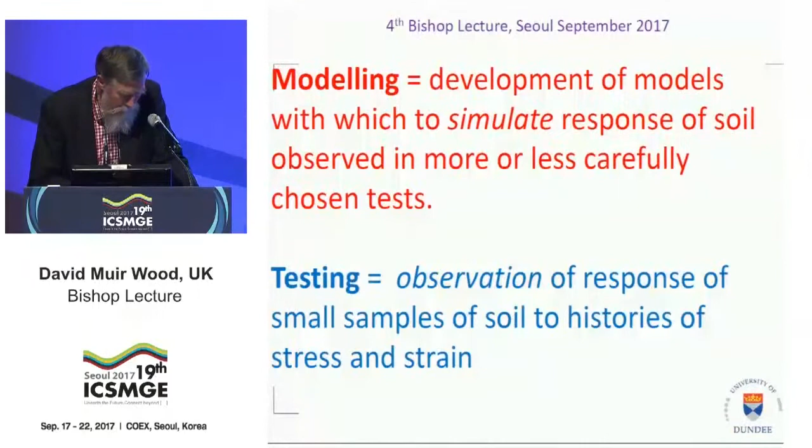So the constitutive model is something which mostly we don't try to spend the time dealing with. We just use it because it's the building block in the numerical analysis between the equilibrium statements, changes in stress, and the compatibility statements, the changes in strain. But it's there. And you may have to choose to use an elastic model, a Mohr-Coulomb model, or a Cam-Clay model. These are all familiar names of models that we'd use in numerical analysis.

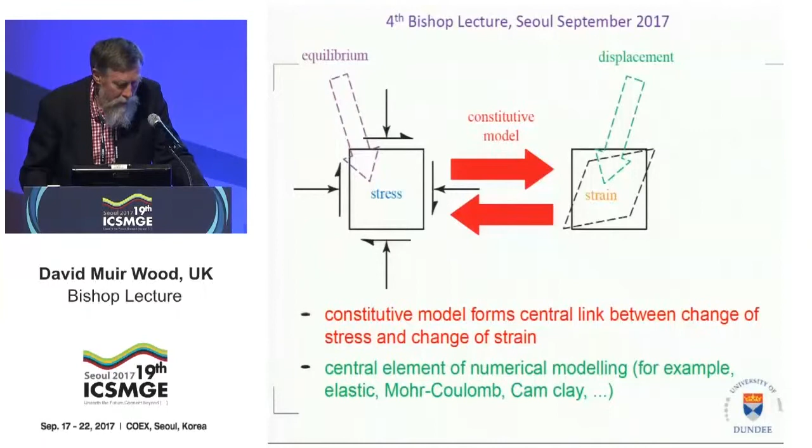But all testing that you perform is conducted in the context of a particular model, either willingly or unwillingly, consciously or unconsciously. For example, much testing is done in order to choose parameters for a model itself. That's a common theme. Fitting models to observations, another common theme. Rarely attempting to refute the constitutive conjectures, the way in which the models are built. But we'll see that's actually rather key.

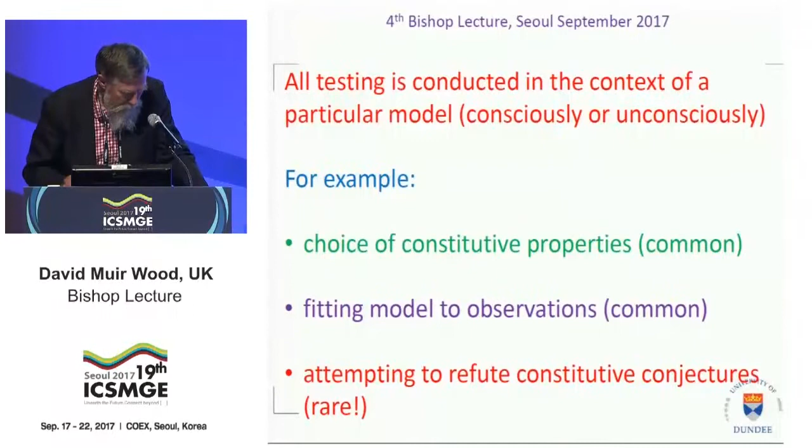So I'm going to concern myself with continuum models, which is to say we're going to deal with macroscopic concepts such as stress and strain, although we'll see they're difficult to define, simply because the models which I've used mostly are, in fact, described in terms of stresses and strains. So elastic plastic modeling is my theme, or has been my personal theme, but the comments that I make about modeling are relevant also to other constitutive frameworks. As I said, the printed version contains additional case histories for which there's not space in this lecture.

So the first thing is then element or system, and thinking about intermediate scales. What is the size of the representative elementary volume that we might define for a real soil material? And the question really to associate with that is this one. How large should a sample be in order that it might appear homogeneous? The first guess would be to say that the scale of the problem is set by the median particle size D50. But it will turn out that's really very optimistic as a guide.

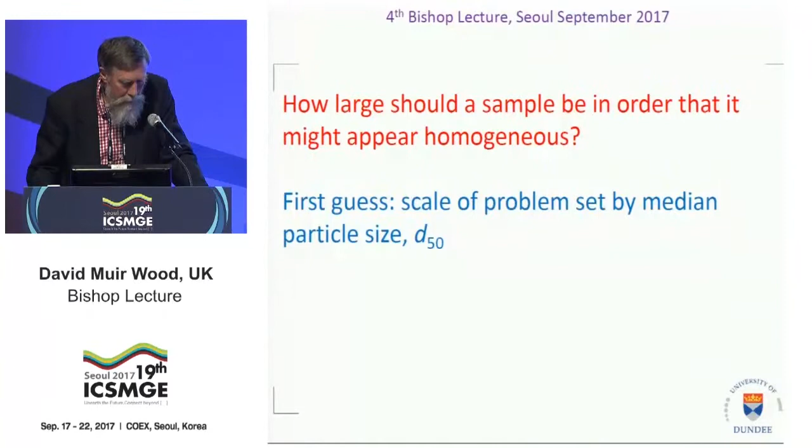But this idea of the particle size influence is relevant because when we start thinking about a scale, then that rather indicates the sort of size of sample that we need to fit in the number of cells of behavior. We'll see that in a moment. So the first thing is then to look inside the sample. And we can look inside the sample, first of all, in terms of deformations. That seems to be the easier thing to do.

And I'll pick an example, an elaborate apparatus, but one in which we can see quite a lot about the behavior of the material. This is the so-called 1-gamma 2-epsilon apparatus developed at Grenoble. When I first saw this apparatus, it was made out of Technic Lego, but it's now made out of rather more substantial materials. But it's a plane strain apparatus in which there's nothing happening in the out of plane direction. And it uses an analog granular material, not real soil, but actually rods, a so-called Schneebeli material we'll see in a moment.

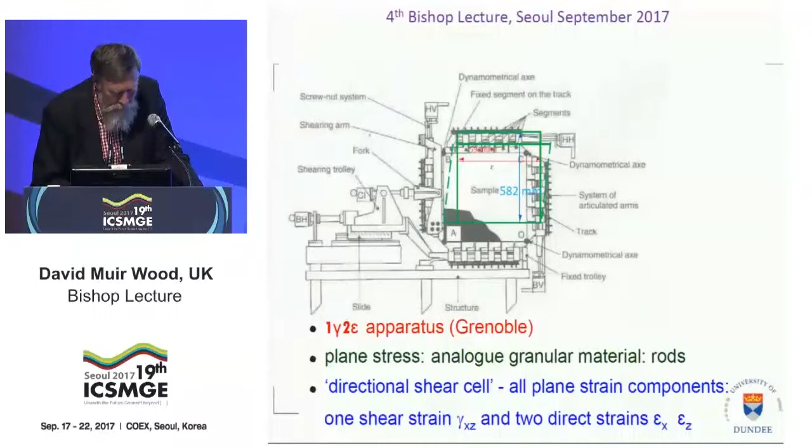It's a directional shear cell in which all the plane strain components can be applied. You can have one shear strain, and you see the shape of the sample changing here, and also apply direct strains in the horizontal and vertical directions. So there are these two direct strains and one shear strain. Here is the grading of the material tested. It's an analog material with three sizes of rods, 1.5, 3, and 3.5 millimeters in this case.

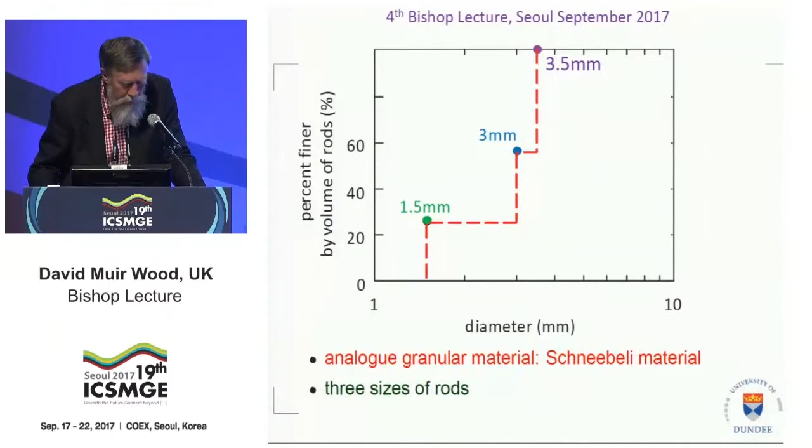And this is a typical result from fairly early on in a shear test on this material. We start off with essentially a uniform distribution of these rods, but very quickly, in the very early strain stages, you see that the shear strains and the volumetric strains show really quite a structure of variation, and you certainly couldn't say that they are varying uniformly across the sample. So there's clearly something happening which is to do with not just the particle size, but to do with a scale bigger than the particle size.

So we've got homogeneous boundary displacements, but the internal strains are clearly showing something which is quite clearly patterned and heterogeneous. And I think that when one looks at these things, one sees that the stage at which these strain features develop is very early on, and it's almost as though the heterogeneous state is the natural state of these soils. In this case, perhaps there's a cell size with a dimension of the order of 15 times d50. So that would be an indication of the sort of size of a building block from which you might build up observations.

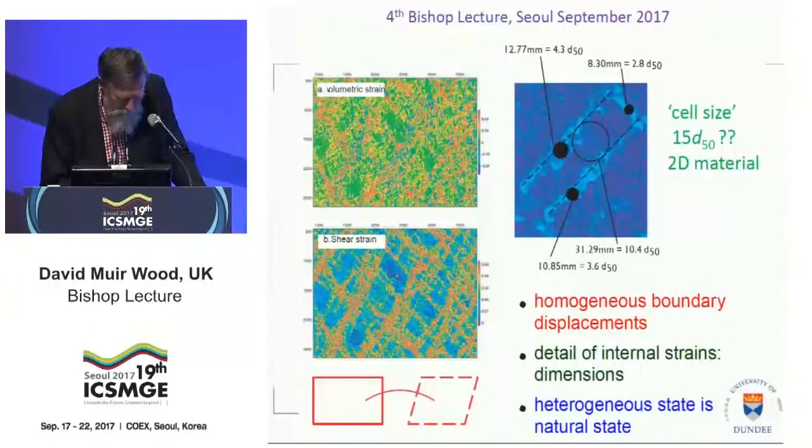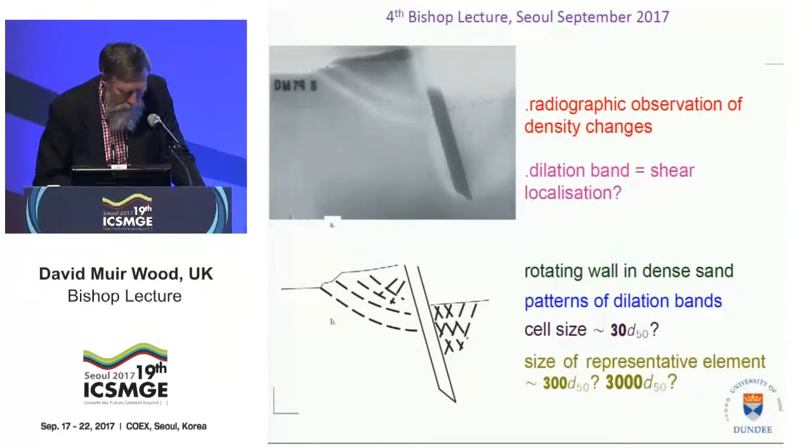That's looking inside the sample using strains. Can we say anything about the stresses? Well, we know that Burland said that stress is a philosophical concept. We cannot see stresses, we can only see the consequences of stresses.

But if you have a birefringent material, as we'll see in a moment, we can use analog soil particles and visualize them under polarized light, and then see patterns which give us some indication about the stresses within those samples of the material.

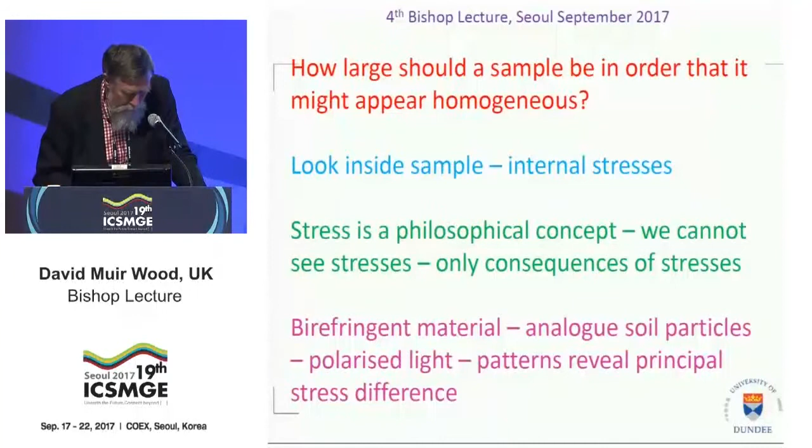So, for example, you have a disk which is being subjected to diametral load of progressively increasing magnitude. As you observe this under monochrome polarized light, you get a series of fringes forming, and the pattern of fringes progressively develops as the load increases. So as you go from low load to high load, the number of fringes increases. Low load here to much higher load there.

And this pattern can be used to deduce the difference in principal stresses within the particle, the material under study. These are diametral loaded particles. And just by the way, if you have a spherical particle, you can also see these same sorts of fringes within that particle. And here's a bit of crushed glass as well. The same thing applies for that. But of course, it's much harder to interpret these things when you have a rather irregular shaped grain as opposed to the single disk of the previous case.

But these are the tests done by Drescher with de Josselin de Jong back in the 70s, classic tests showing the effect of stress changes on an assembly of photoelastic disks. The main diagram shows the disks themselves. The lower diagram shows the interpretation of a picture like that in terms of the forces between the particles of the photoelastic picture. So the thickness of the lines indicates the size of the interparticle force.

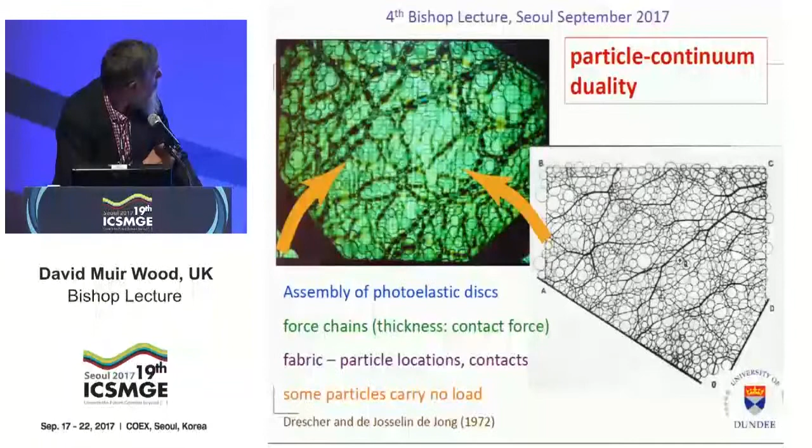What you clearly see from this immediately is that there's a huge variation in the way in which the stresses are being transmitted through this particle assembly. Looking at the main picture, some particles have no stress in them at all. Some particles have very heavy stresses in them. And this is something which has been found also in discrete element modeling. In a sense, the DEM work has done nothing but show that the photoelastic pictures of Drescher and de Josselin de Jong were correct.

We see columns of particles carrying the load. We see that the adjacent particles may carry very little stress, but actually are there to provide a bit of resistance against the buckling of the main columns. And you can imagine that this whole assembly is very sensitive to rotation of the principal axes.

So just look at these various cases ringed here. Some of them indicate very high stresses at the particle contact. Against the unloaded boundaries, there's very low stress. Obviously, there's zero stress in the voids, and some particles themselves have no stress in them whatsoever. So the concept of stress in a particulate material obviously is something which is really quite difficult to get to terms with.

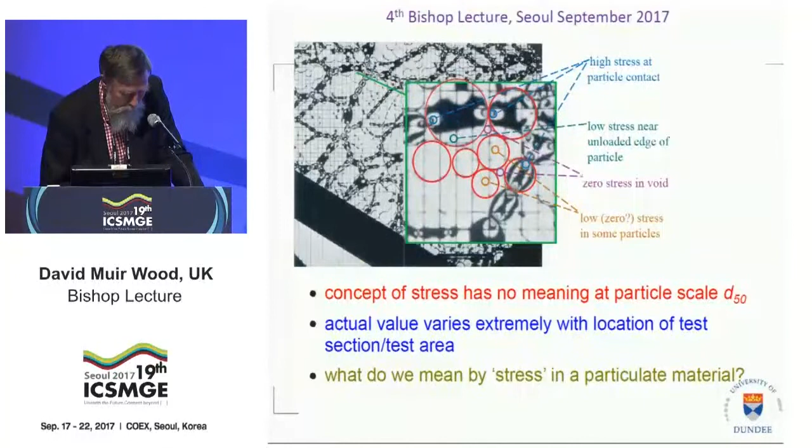Well, okay, let's see how small an element can appear homogeneous. If we look at the fabric of the material, at these force chains, you could say that the typical network mesh size, the typical size of these loops here, is of the order of 5 to 10 times the particle size. So perhaps the network is going to be characterized by that sort of dimension, and a continuum could be described as one which has scales of perhaps 10 to 100 times that, so 500 to 1,000 times D50 here.

So if you stand back and look at a network of that size, then you'd see essentially homogeneous heterogeneity appearing in the material, if you can imagine this concept. But it's just defining another scale which is considerably bigger than the size of individual particles.

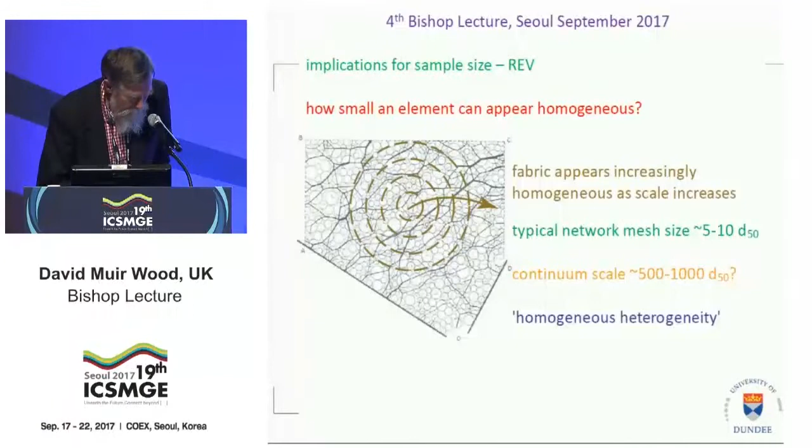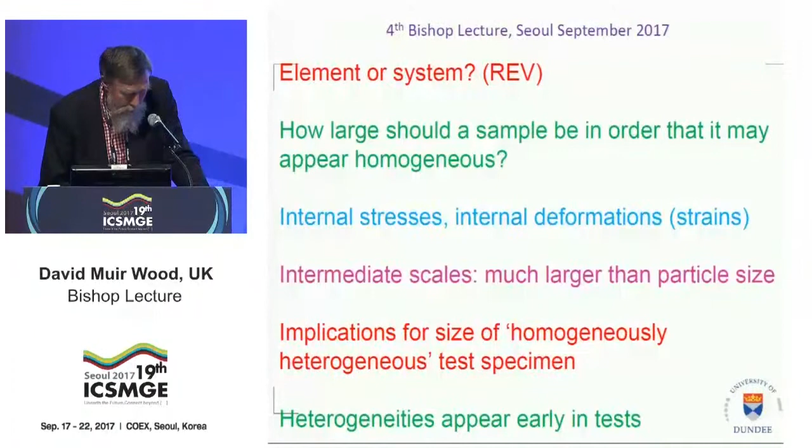So the question was, how large should the sample be to appear homogeneous? And the answer is that it's much larger than you thought. And this has implications for the size of the homogeneously heterogeneous test specimen that you might choose to use. There's also this clear result we find that these heterogeneities, these changes in the non-uniform structure of the deformations, appear very early in a test, not late on. So those are the conclusions for that particular section.

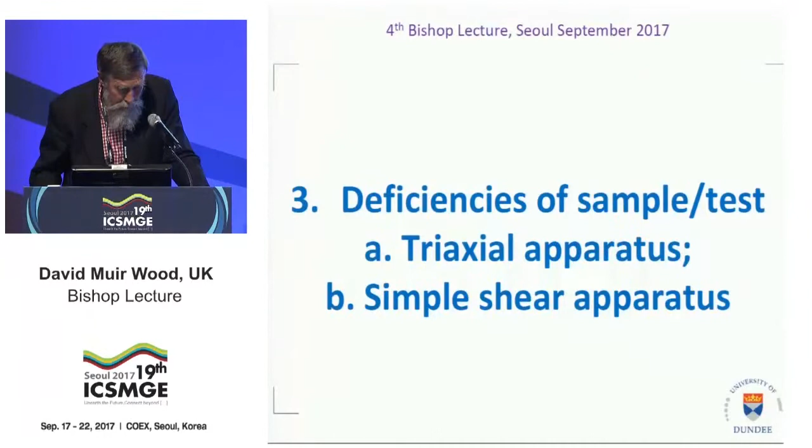Now the next one is then going to be deficiencies of the sample, or the test. And we'll look at two apparatus, the triaxial apparatus, which has been mentioned already this morning, and the simple shear apparatus. Well, we know that if you have triaxial samples, then sometimes you may find that the imposed stress state is actually axisymmetric.

We have a cell pressure we're applying around the sides of the sample, but there's no particular guarantee usually that the soil specimen has a vertical axis of symmetry in terms of its anisotropy and its fabric. So it's being compressed between rigid platens, but there's no particular reason why that should result in an axisymmetric stress state within the sample. So it may be, if you're lucky, that actually there is a resulting axisymmetric stress state, but it's only going to be by chance rather than by routine.

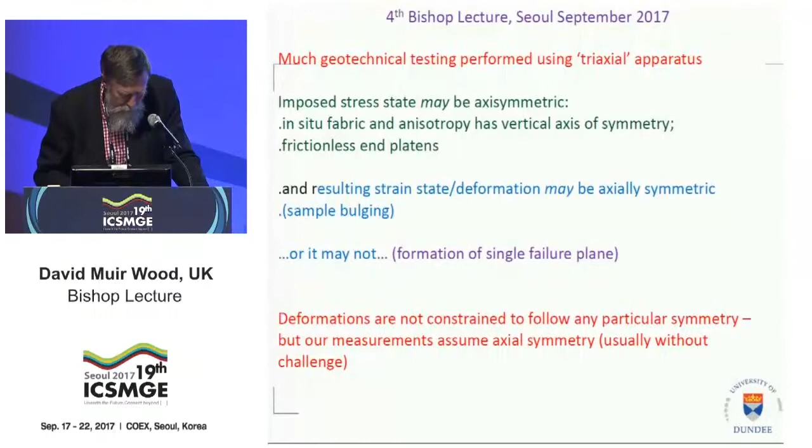So the deformations are not constrained to follow any particular symmetry, but our measurements always assume that, because all we do is measure the external axial strain and volumetric strain, and we assume that axial symmetry without any challenge. So it's very tempting to assume that things that you don't choose to observe don't even exist. You imagine this is a sample taken out of the ground with a natural anisotropy which is not clearly vertically oriented. We try to subject it to triaxial compression testing with either rough ends or with smooth ends, and the sample will do what it wants to do, but it won't behave uniformly under that imposed constraint.

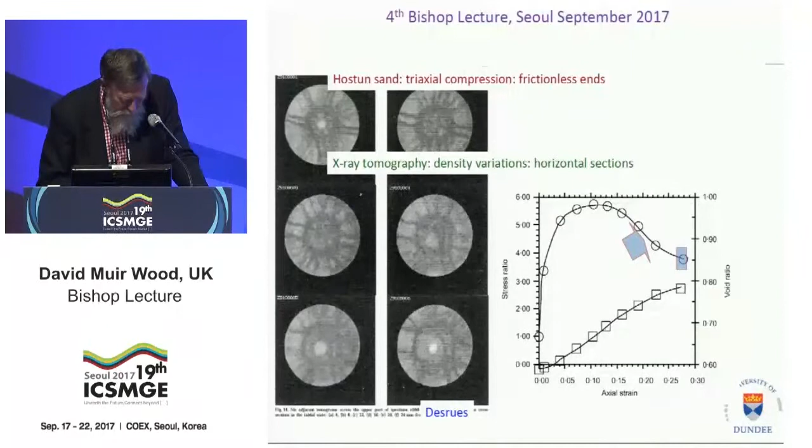Well, there's wonderful work been done at Grenoble by Jacques Desrues and more recently by Eddie Andò, using tomographic techniques, using X-rays, for example, to detect variations in soil density, from which we can produce really quite elegant and intricate mechanisms of internal deformation. These are ones which show the volumetric strains that he picked up in the 90s. And these are sections you can see through a triaxial sample, and if you try to put them together, you get these really rather fancy, amazing mechanisms of volumetric strains occurring within a triaxial sample.

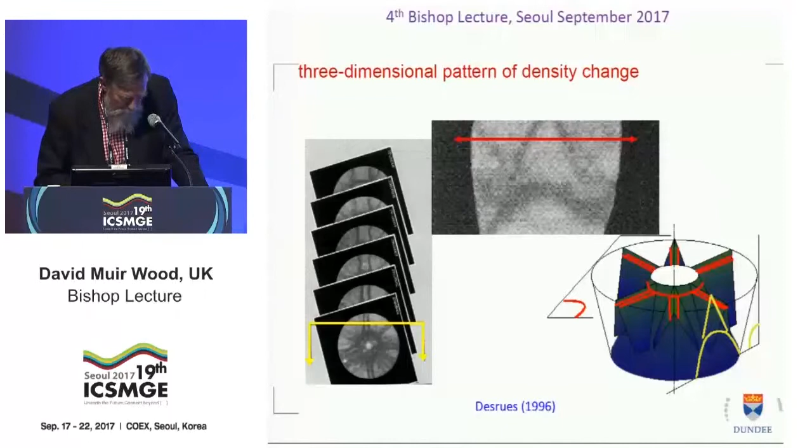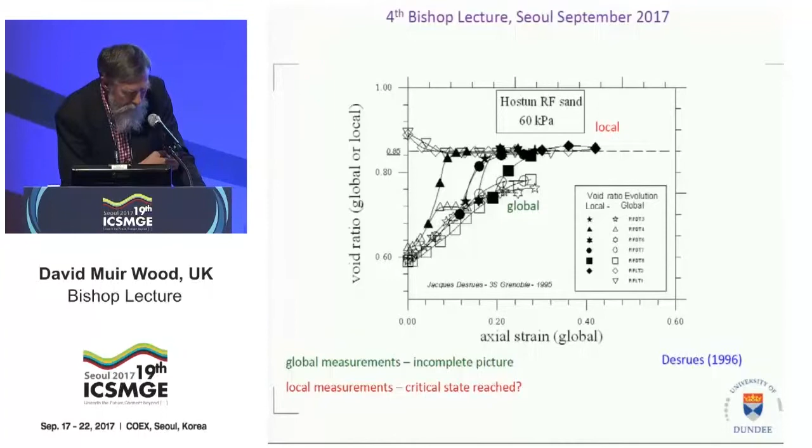So this is a sample which we think is behaving in axial symmetry, and here we have these mechanisms which are clearly not axisymmetric mechanisms at all. It's behaving in a totally different way, a free way, if you like. And these are taken from X-rays at various stages of the testing. And in fact, if you look at the volume changes within the shear bands, then you find you get a consistent critical state condition, whereas away from those bands, you get a much more delayed response. So tracking density changes shows that the critical state is reached within the dilation bands, but not globally within the sample.

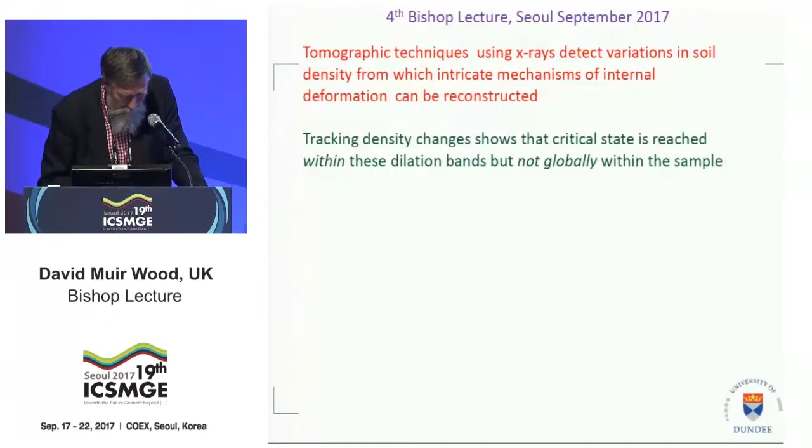These are more recent imaging done by Eddie Andò and Jacques Desrues, which are fantastic pictures showing variations in distortional strains within the sample. So these are totally not axisymmetric pictures. They're mechanisms of deformation which are beautiful and elegant, but are showing something quite different from an axisymmetric response in our triaxial sample. And we await more talk about these pictures from the Grenoble people.

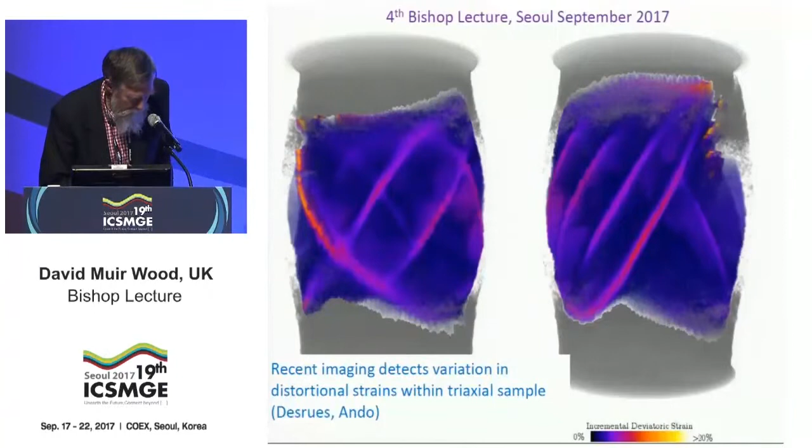So the implications that we see from these pictures is that we've got individual mechanisms which are far from axisymmetric. They reflect the response of the sample to the imposed stress and the boundary displacement constraints, but a response which is very specific to the triaxial apparatus and nothing to do with what happens in the ground. And once again, we see that precursors of such mechanisms are very small deformations. So even from an early stage of the testing, we're getting these deformations occurring.

Now, I did my research at Cambridge. I started my PhD research just after Roscoe had been killed, but he had an obsession throughout his research career with simple shear testing. Perhaps he's right, I don't know, but he was very keen on that device. But the simple shear device is well known to be flawed because there is an absence of boundary shear stresses on the head of the sample here.

So without the shear stresses there, you need to do something about measuring the distribution of normal stress, which itself is variable, as in the second picture, across the sample. And one way to cope with that is to surround the sample with load cells, so stress measuring devices, as in this bottom picture here, which essentially is an apparatus used by Stroud, whose name was mentioned this morning, for looking at the behavior of sand under simple shear.

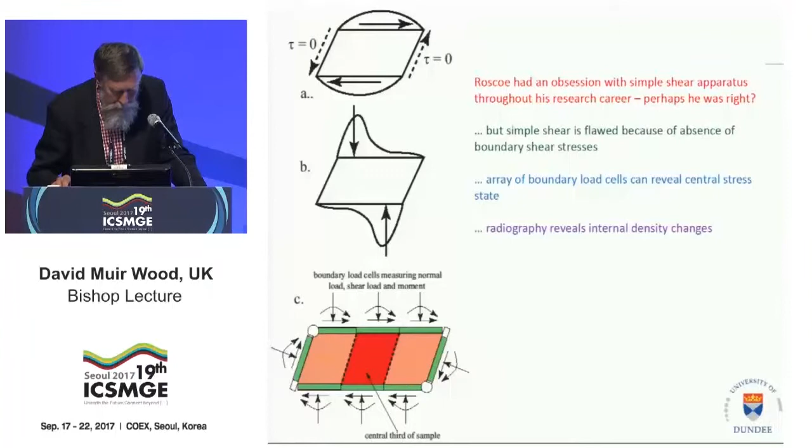So that's the way of looking at the stresses. And with X-rays or radiography, you can look into the sample and see the density variations and try to see what is the effect of the sample size on the density variations, patterns of those that occur within the sample. And the question we can ask ourselves here is, how high should the sample be? What should its dimensions be?

Should it be just high enough to contain a single shear band? That feels too constrained, but it's one possibility. And essentially that's the one that Stroud adopted, so you had a 20 millimeter high sample for 1 millimeter size sand. But alternatively, you might say, well, let's make the sample high enough to allow free development of internal shear bands. This is a picture from Dicky Bassett's work.

But then you start seeing elaborate internal patterns which are strongly influenced by the corners of the apparatus. So these variations of density here are essentially really rather curious effects produced by the corners of the device. So the ideal sample height perhaps depends on the size of the material being tested.

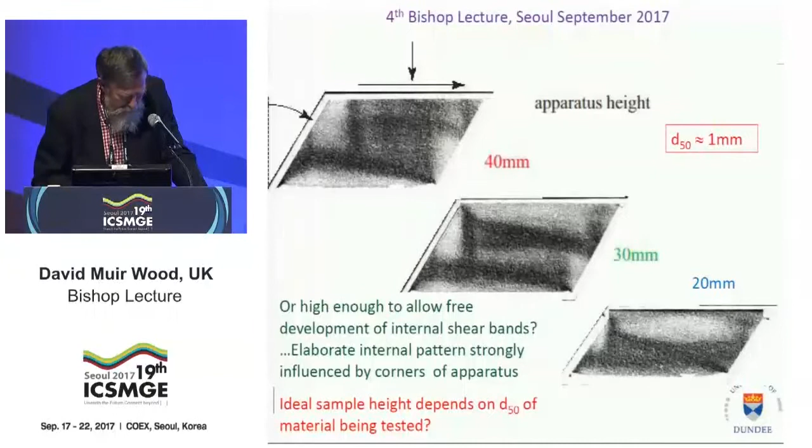I mentioned that when we're looking at the behavior of these columns of particles heavily loaded, that they are very sensitive to rotation of axes. And as a corollary of that, one might say, well, one should be looking at laboratory tests which try to themselves look at the effect of rotation of axes. But you'll see that the possibilities that we have are limited and all rather flawed in their different ways.

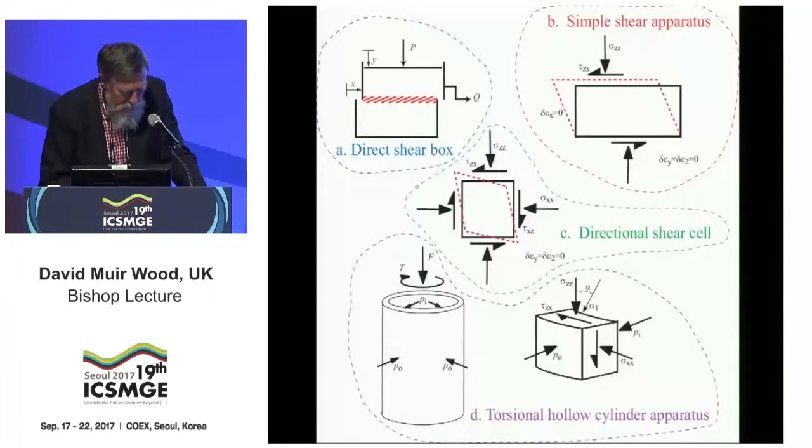Obviously, the direct shear box is producing a very localized behavior. Simple shear we've just seen has these problems with the shear just on the ends. Directional shear is essentially the Grenoble device, very complicated. And the hollow cylinder has variations with radius of every stress and strain component, and it's difficult to actually assess the uniformity of results from such a device.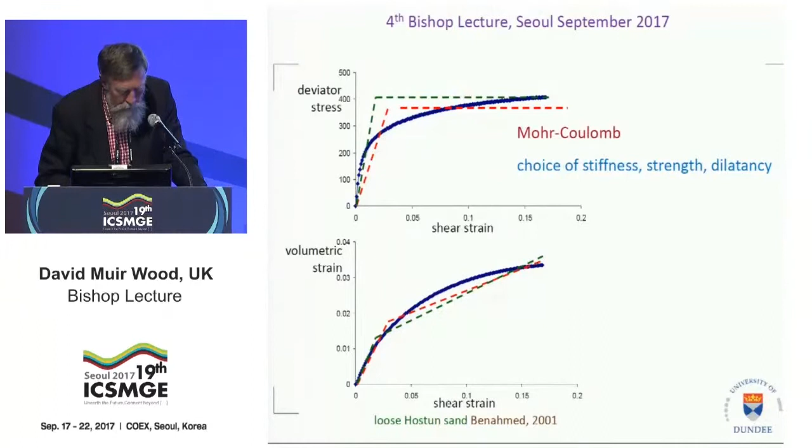And the volumetric response also shows nonlinearity. So we have nonlinear responses in terms of stress-strain behavior and in terms of volumetric behavior, and yet we're trying to fit those with a so-called Mohr-Coulomb model, in which we've got to choose stiffness, strength, and dilatancy to match these data. We can't do it. We're trying to fit two lines to a curve.

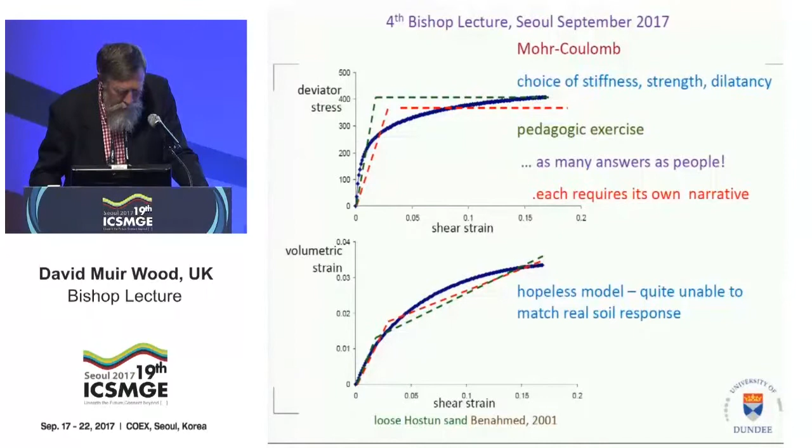So it's an interesting exercise, and if you have a class of 2,000 people as in here, everybody would produce a different answer, and each answer would require its own narrative to describe why you produced that particular set of parameters. It's obviously a hopeless model because we're trying to fit a curve with two straight lines. And if you're faced with a hopelessness like that, the best thing you can do is to change your model in some way to improve the match with the observation.

Let's just quickly look at the problems that we have with this model. There are three problems, basically. One is that the incremental stiffness is either elastic, so it's high, or zero for failure. The second one is that we have indefinite dilation or compression going on at failure. And the third one is that strength is chosen as a soil constant.

But in fact, we can deal with all three of these defects by making some simple changes to this Mohr-Coulomb model. The first thing is this one here. Rather than using a straightforward elastic analysis, we can say that the stiffness varies steadily with strain, and as the strain increases, so the stiffness reduces towards zero. So we introduce a monotonic increase in strength, a reduction in stiffness with strain. That seems straightforward enough.

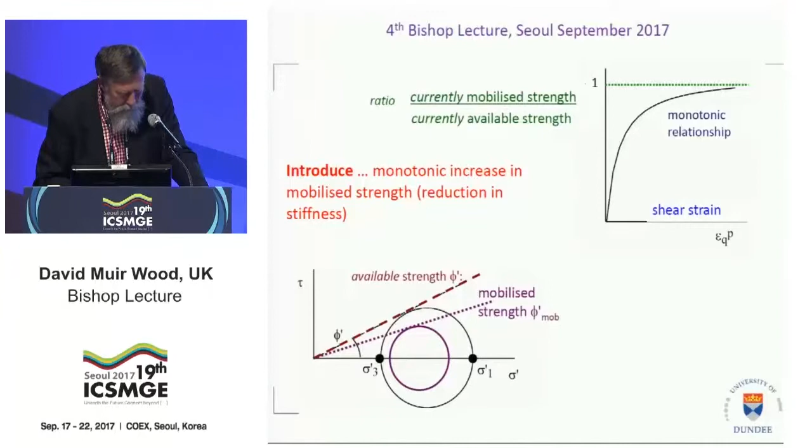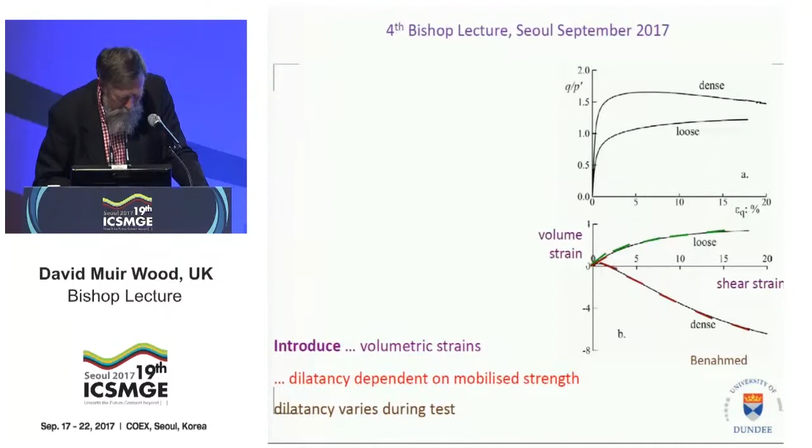The second one is to introduce some dilatancy effect, which is going to say that the volumetric straining varies with density and with stress state during the test. And we can see some evidence for that from classic work from Taylor, where we have a shear box test, always good value. So mobilized friction against deformation here, volumetric change against deformation there.

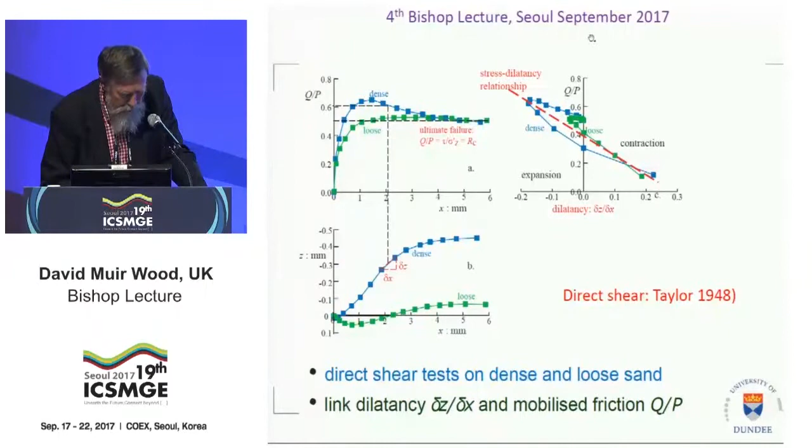And if you look at the slope of the volumetric change graph and plot that against the mobilized friction, then you see something which is essentially a linear relationship or a sublinear relationship between the two quantities. So there's a link between the dilatancy, the volume change, and the mobilized friction of the material. So that's very easy to do, introducing that dilatancy law.

And the third thing to do is say something about strength. These are tests on steel balls done by Peter Wroth back in the 50s, and he was looking at the effect of having different densities, different stress levels, on the ultimate state that you have for this material. So the left-hand diagram shows the specific volume against deformation in the shear box.

The right-hand diagram shows the end states of these various tests. So here's an end state there. All these different initial states produce the same volumetric packing at the end of the test. So the end points fit onto a clear line in terms of the stresses and the volumetric change, a clear critical state line linking these final states of these tests with different starting points.

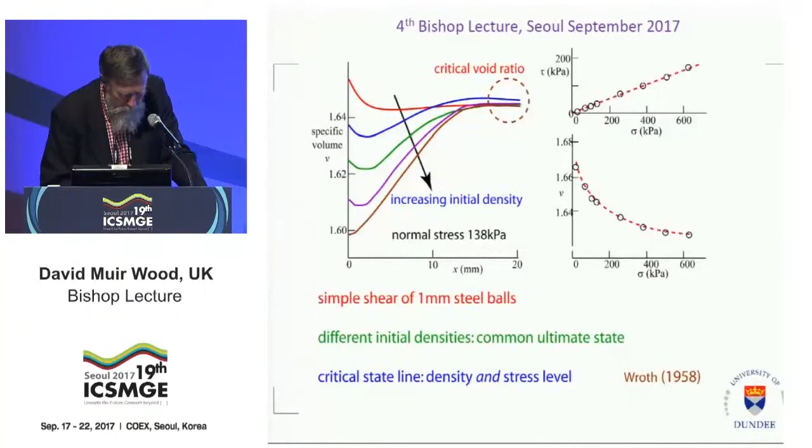So we introduce this idea about asymptotic critical state strength, and such ultimate states define a critical state line. Once you've done that, then you can define a quantity we call state parameter, which is an indication of how far the soil is from its eventual state. And we can then find that actually all aspects of stiffness and strength of soils are dependent on this value of state parameter. And the message is this one, that soils know how far they have to go.

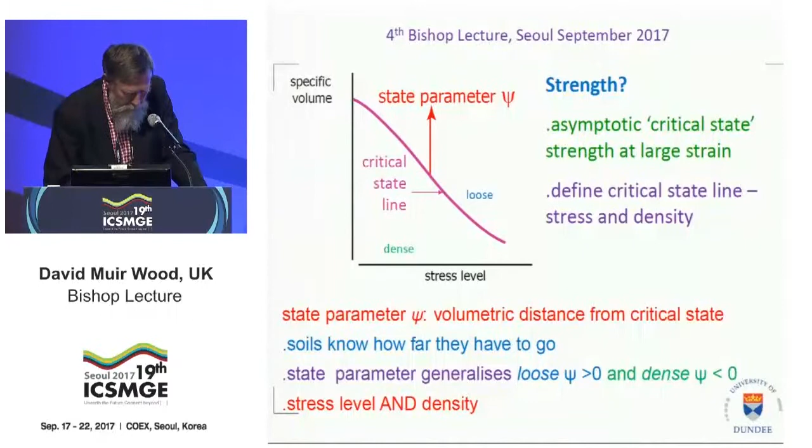So they know that this is the distance they have to go to get to failure. They have a feeling for that. And this idea about state parameter generalizes the ideas of loose and dense definitions. Anything above the critical state line is loose, anything below it is dense. So it's a combination of stress level and density.

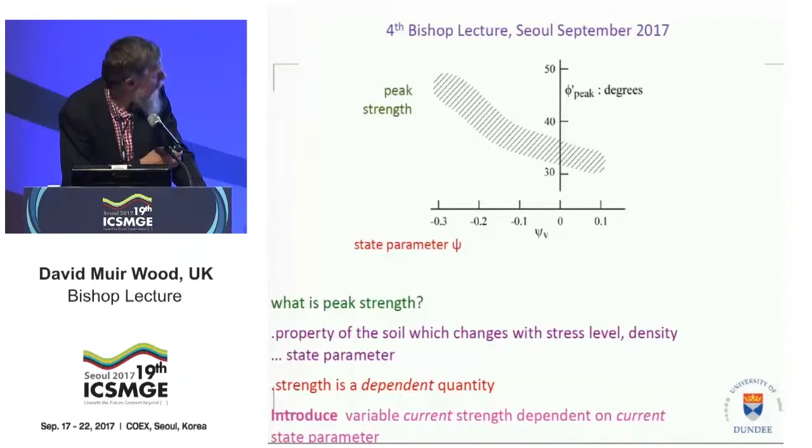So what is peak strength? It's not a constant, it's actually a dependent quantity, because the current strength depends on the current state parameter. So depending on where we are just now, we'll have different values of the current strength. So we have an idea about linking the peak strength, the current strength, to the current value of state parameter, so that we have a complete model.

We call it Severn Trent sand. It gives us monotonic shearing towards the current strength. The current strength depends on the current density. Shearing leads to a change in density through dilatancy, and the change in density leads to a change in strength. So it goes around in a loop here. And so the predicted peak strength is actually an emergent property of the model.

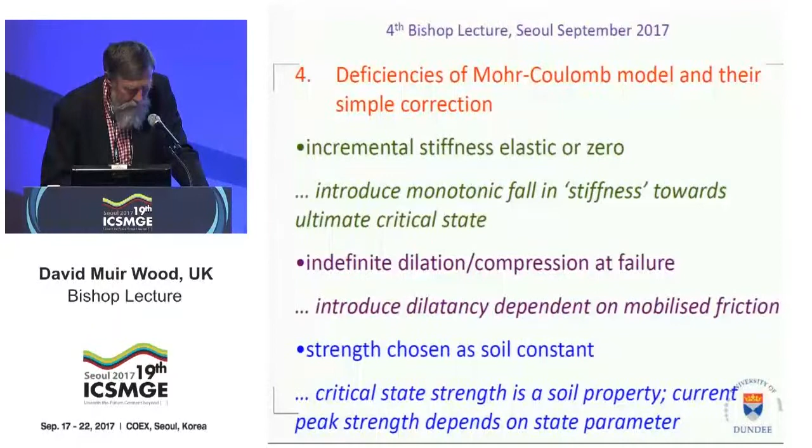So we've got those various stages that we've just described there. And what we see is that miraculously, although we had very simple linear or monotonic relationships, once you put them together, you find you get a model which actually shows peaks and softening, dilation or compression, depending on the value of the state parameter at which we're testing the material.

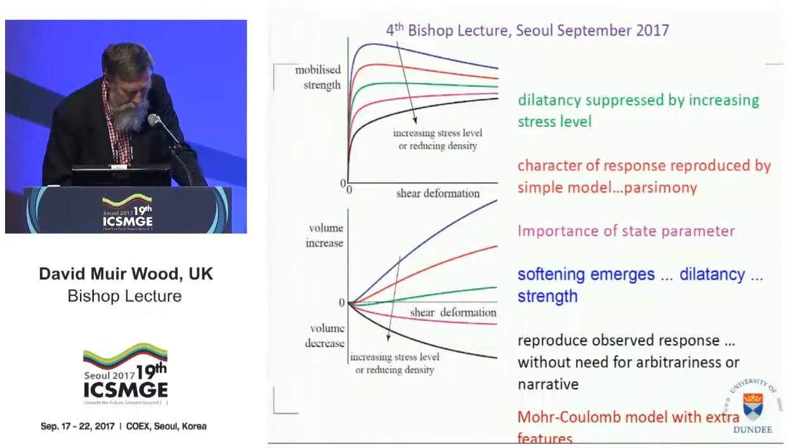So now we've got a model which actually is able to reproduce the observed response for the real soils without the need for arbitrariness or for a narrative. It's just a Mohr-Coulomb model with extra features added to it. Why do we carry on using the Mohr-Coulomb model, I wonder? There are several other candidates which are very similar to this one, which will do the same thing in terms of the ability to describe the variation of response with stress level and density.

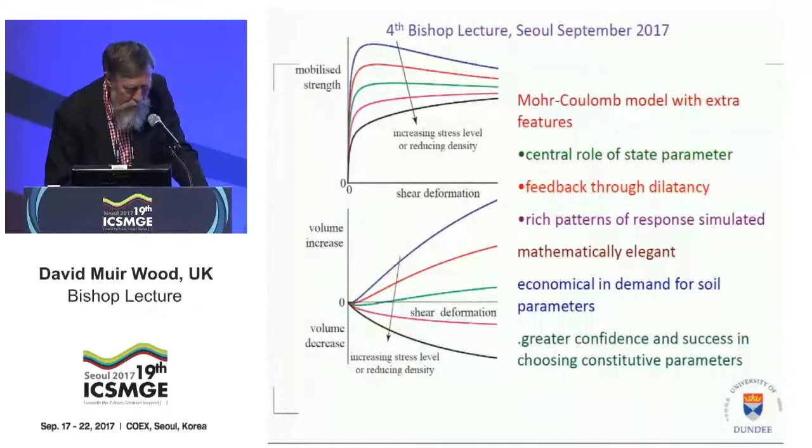So, conclusions now. All testing is conducted in the context of a particular model, whether you think about it or not. The interface between modeling and testing is challenged by deficiencies of the testing, but also by deficiencies of the model. Internal heterogeneities are typically observed from an early stage. Single-element tests are not single-element tests, they are systems, and there's a challenge of deconvolution to try and work out what's happening from the observed external response.

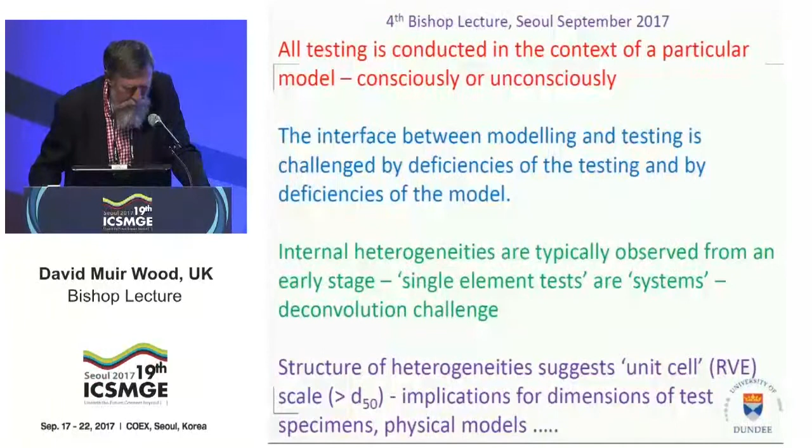The structure of heterogeneities suggests that the unit cell has a scale much bigger than D50, which has implications then for the dimensions of test specimens or physical models on the material. Where you have a model and observation which are clearly totally mutually inconsistent, like the Coulomb case, clearly an improvement of the model is required to improve the response.

It is tempting to assume that things you choose not to observe do not exist. It's very simple to say we have a triaxial sample being observed and we measure the volumetric strain and axial strain, but there's all sorts of things happening inside the sample which you cannot see from the outside. There's probably no perfect test, but what we do need is more elaborate monitoring of the tests we do in order to reveal the actual response that's happening inside the soil.